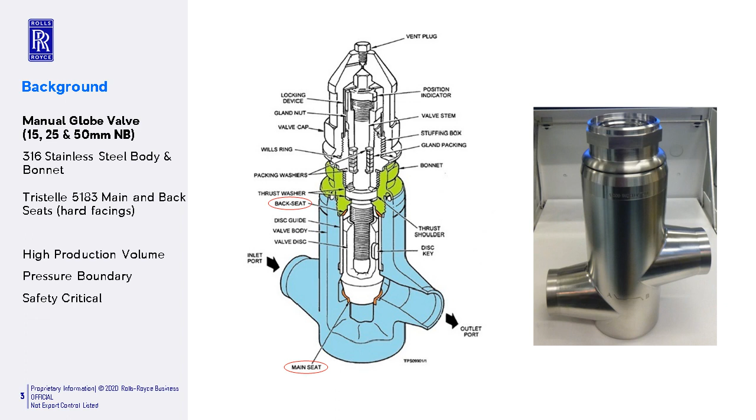So a little bit of background around the current method of manufacture. Step one, we take a large rough machined initial billet of 316L material. Step two is then to produce the Tristelle insert. This is made from metallic powder that is hot isostatically pressed, hipped into bar form and then machined into the insert.

Step 3 and 4 is around producing a stainless steel plug, which is then used in step 4 to encapsulate the Tristelle insert into the wrought body. This then goes through a second hip cycle, which actually bonds that Tristelle to the 316 material. Step 5 is around machining the internal profile of the component, including the main seat. Step 6 is around the final machine of the external form. This same process is used for the back seat when producing the bonnet component as well.

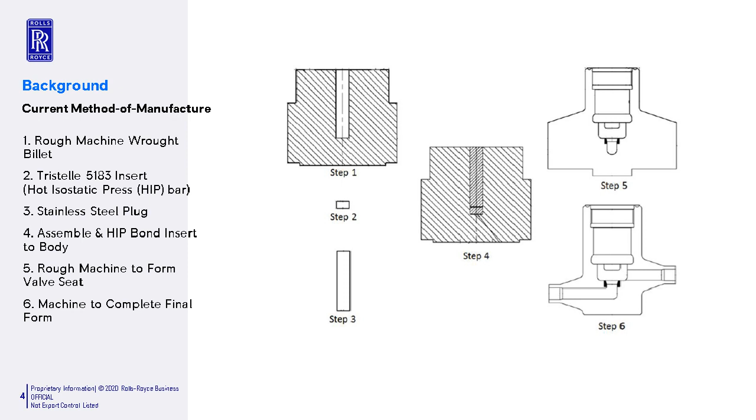So what are the issues with this method of manufacture? The mass of the initial forging is around 10 times that of the final part, so we have a significant amount of material waste. In step 2, there's a long lead time in terms of production of the hip insert. In step 3, the stainless steel plug is not actually part of the final component and therefore is 100% machined away. There's a cost in terms of cleaning and welding of the parts prior to the hipping process. And as mentioned, there's a significant time and cost for the actual machining stage in producing the final part from the billet.

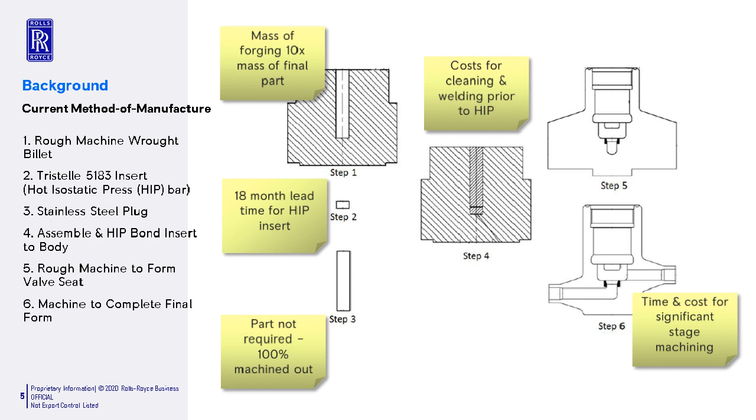So how does the AM method of manufacture differ? We again start off with stainless steel and Tristelle metallic powder produced within our supply chain via gas atomization. This is sieved to the specification powder size requirement. We then start the build with the Tristelle inserts, built on stainless steel discs using laser powder bed fusion additive manufacture technology.

These are then cleaned, packed, and stored for later use. We then build the stainless steel body or bonnet component using, again, laser powder bed fusion technology up to a midpoint just above the location of the actual insert. We pause the build and evacuate the powder from the insert location, leaving an inbuilt recess. We then take the previously produced Tristelle insert and position it in the build with the stainless steel disc uppermost, and continue the build process over the insert, encapsulating it in position until the final near-net shape valve body or bonnet component is formed.

Material control samples and hip bond specimens are also built on each build plate for later assessment. Once the entire build plate is complete, it is removed from the machine and put through a HIP cycle, which ensures a number of key issues.

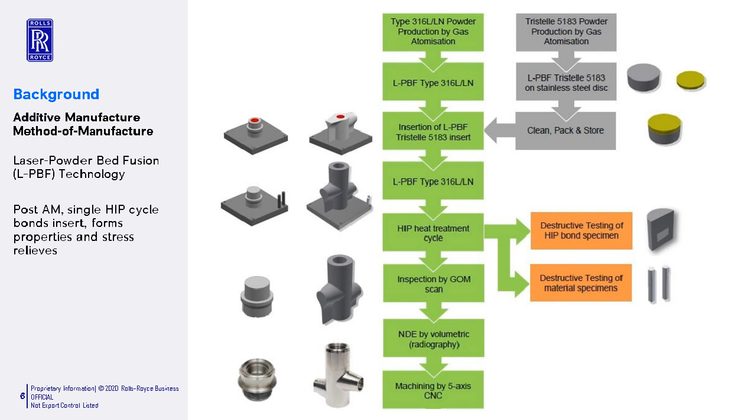This slide gives some illustration of the AM method of manufacture. So from left to right, we have the initial Tristelle 5183 insert built on the stainless steel disc. We then see the valve bodies built up to the midpoint where we pause the build and evacuate the powder to reveal the insert location.

You can then see the loaded Tristelle insert in the body. And then finally, once the build is complete, the valve bodies are removed from the machine along with the control specimens, and the complete build is then passed through the HIP cycle.

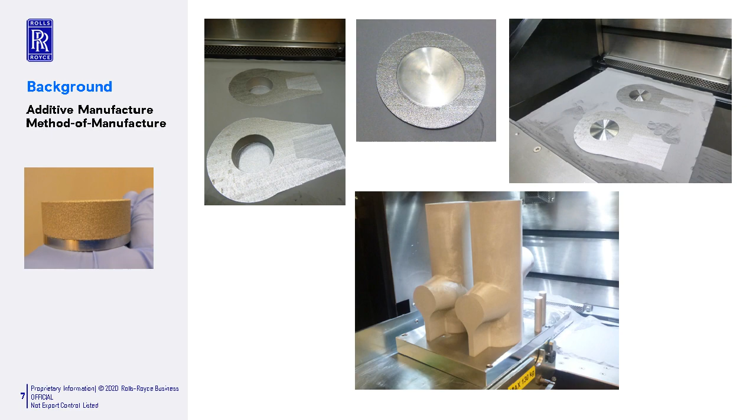So once the method of manufacture is established and the application is chosen, how do we get buy-in from the business and the customer to invest in the novel technology? Well, we developed a business case.

This is not solely based on cost reduction and lead time improvements. We also took into account a number of additional benefits. One of these being the additional quality assurance provided by the process. So we accept the metallic powder before it comes into the business, as well as accepting every build plate with examination of the material control samples and the hip bond specimens.

Also, the choice of materials allows us to exploit the technology further, as they cover a broad product range within the business. So once we establish an operational baseline, we can then look to exploit the technology further and expand on the number of applications.

Also, as Rolls-Royce are leading the implementation of the AM technology, it allows us to share our understanding with other parts of the Rolls-Royce business and our key partners across the enterprise. And then finally, using novel technology promotes innovation, so we've got a number of patents being filed just on the manual globe valve application itself.

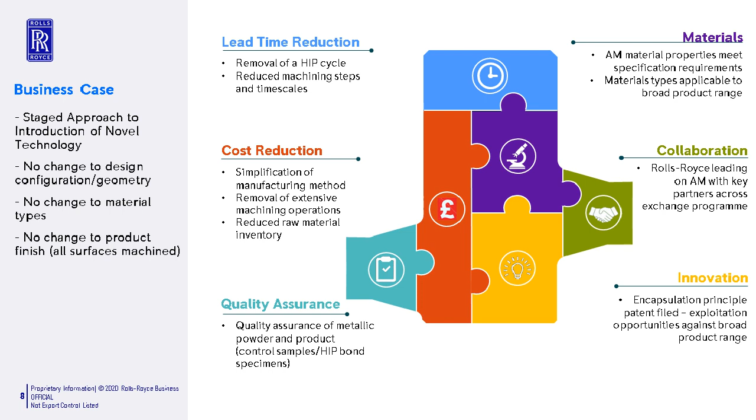And then, as we get operational experience and confidence, we can start to really use and exploit the technology more, push the design and actually design for additive manufacture.

So how do we go about providing a robust design justification for the introduction of the novel technology, noting that this is the first pressure boundary application on a safety critical component? We set out the justification around four independent legs, principally based on the TAGSI methodology.

That is the Technical Advisory Group for Structural Integrity, which the method was originally set out for achieving an incredibility of failure type argument, which isn't required for the manual globe valves. But we've used it as the basis for the methodology, to provide what could be termed a beyond code case for this safety critical application.

And the four legs are made up of design and manufacture, with the major input being from the technology itself and development of the method of manufacture. Leg 2 is around functional and performance testing.

So testing we've done on the material and the components during the development phase, and also once the parts are in production. Leg 3 is around failure analysis, stress, fatigue, and defect tolerance assessment. And finally, leg 4 is forewarning of failure, looking at the through-life aspects, failure mechanisms, and any in-service testing and inspection requirements.

So the presentation now goes on to expand on each of these four legs.

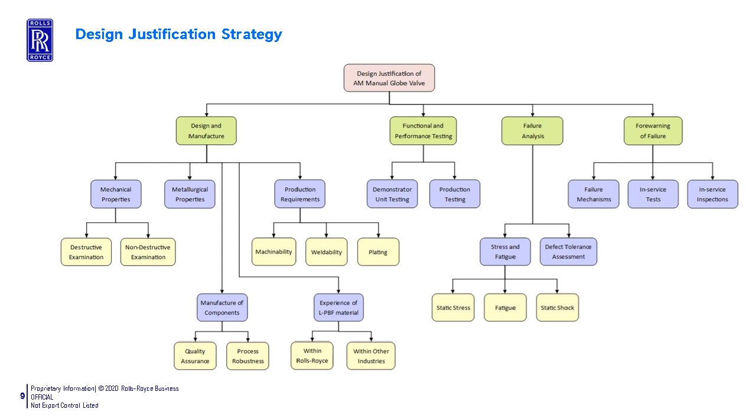So, as expected, with the introduction of a new and novel material production method, we've carried out a significant amount of materials assessment and testing on both the stainless steel and the Tristelle materials. We've not got time to go through this entire package of work in detail, but some of the key points are...

All the materials were tested in the final condition, post the HIP cycle. We tested a number of different material batches in a number of different test orientations, all with the intent to demonstrate that material properties were equal to or better than the current wrought material specification.

In terms of mechanical tests, we did tensile, Charpy, hardness, fatigue, fracture toughness. Metallurgical tests included chemical analysis, grain size, cleanliness, macro and microstructural analysis, also looking at the 316 to Tristelle bond line in detail, and also corrosion testing — stress corrosion cracking, pitting, crevice, and intergranular cracking.

All these assessments are really looking at the material behaviour and looking to understand if it has similar characteristics to its wrought equivalent.

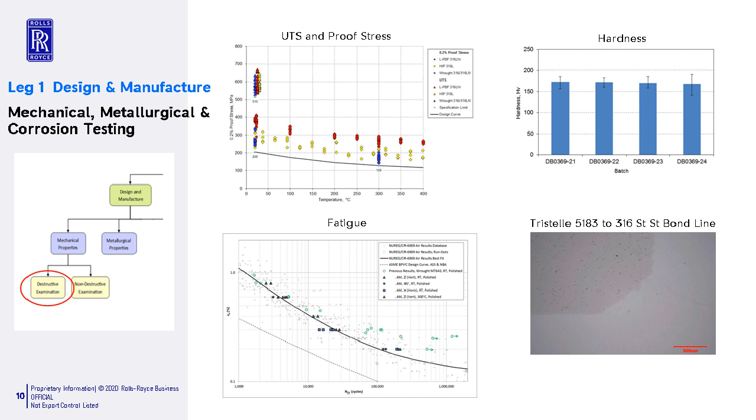One of the key concerns around the AM technology is the in-process residual stress and the effect this can potentially have on the start-of-life material properties.

So we performed contour residual stress measurements taken directly through the center of the valve body, including the valve seat, which was an area of concern. This confirmed that there were no significant residual stresses remaining in the final part after the HIP cycle.

We also, as you can see in the figure on the right, purposely introduced a defect in order to understand the residual stress effects from a lack of bond on the external surface of the component. We also saw a surface effect on the upper section, believed to be due to the sectioning and measurement method applied.

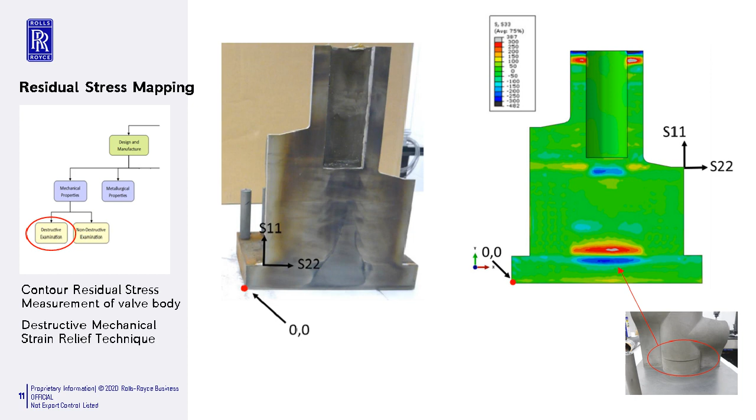So still on leg one, in terms of non-destructive examination, the current process — the 316 forge bar and the Tristelle 5183 hipped bar — are all examined using ultrasonic inspection techniques, using standard methods against code requirements.

However, with the additively manufactured valves, this introduced the requirement for a radiographic post-HIP cycle inspection, principally as a result of the near-net shape of the parts, and also from analysis of the potential start-of-life defect sizes and their forms.

So in order to understand a little bit more about the potential defects, we had an expert elicitation exercise, which included company experts local within Rolls-Royce, and then also the wider academia, in order to understand and agree the potential range of start-of-life defect sizes with this particular method of manufacture. These are then used to guide the inspection techniques to apply, and also the acceptance criteria for these inspections.

Something worth noting is that as confidence grows in the technology and its application, we are looking to exploit the AM further with the use of the through-process melt pool monitoring that the machines offer, and hopefully use this to eliminate the requirement for traditional volumetric examination methods, obviously with the cost and timescale benefits that brings.

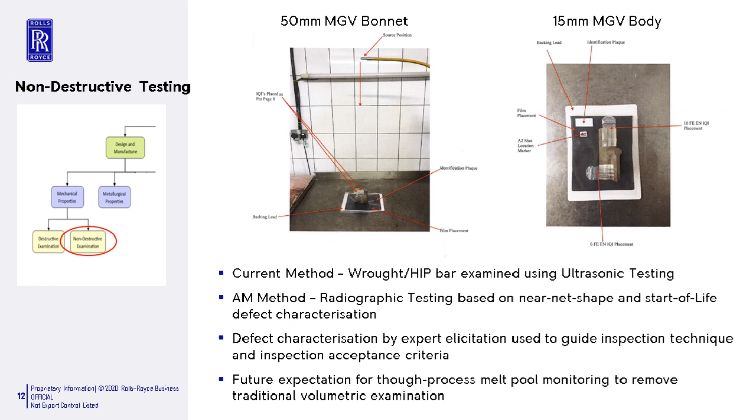Finally, in terms of leg one, we also carried out a number of trials reviewing standard production methods, including weldability, reviewing weld width to depth ratios, and also trials on both automated and manual welding of canopy and fillet welds.

All trial welds were assessed via mechanical properties, microstructure, and corrosion resistance, all with the expectation to confirm that the existing weld procedures remain suitable and can be applied without change.

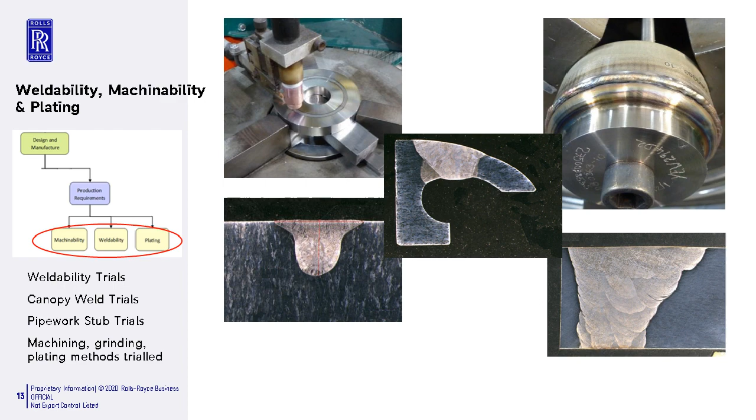Also, as part of this leg, we confirmed that the material performs as expected when applying traditional machining, grinding, and plating methods, and the results were equal to its wrought equivalent.

Just moving on to leg two. This is around the function and performance of the body and bonnet components, and when built into the valves, really to confirm that they're suitable for use and will operate successfully for the full lifetime of the plant.

So, as well as the extant testing methods that are applied to the current components as part of production, such as component hydro tests, valve seat checks, hot and cold valve testing, we also specified tests that go beyond the code requirements. We undertook an ultimate hydrostatic pressure test, an endurance seat performance test looking at wear of the seat, a shock test, and also a thermal fatigue test.

So the next few slides just expand on these tests.

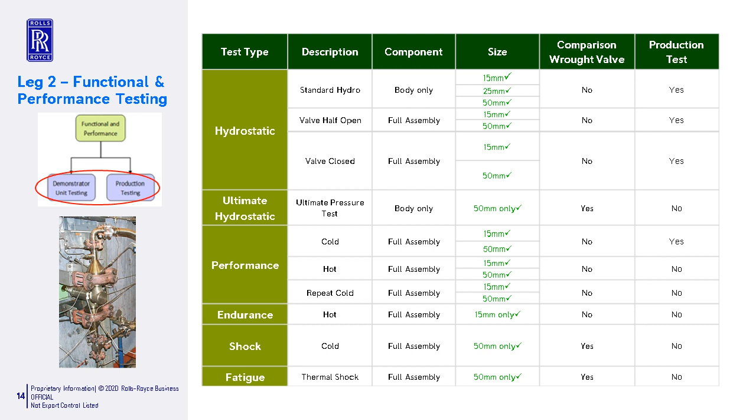So in order to explore the full pressure capability of the AM components, we carried out what we expected to be an ultimate pressure test, really in order to initiate failure. This was on both an AM valve body and a wrought valve body, to enable a level of comparison between the two manufacturing methods. We designed a pressure test rig to go well beyond the design pressure of the components and apply an increasing internal pressure at stages to the blank top bodies. This rig was able to go up to around 2,000 bar, so we're really trying to blow up the valves.

What we found was that both valve bodies retained the full pressure without failure, just experiencing a level of permanent deformation, which you can see from the image on the right. You'll notice the AM valve had slightly less deformation, which we believe was a result of the slightly enhanced proof stress properties we previously discussed. During each test, we also took strain gauge measurements at two locations that proved both materials and material manufacturing methods had representative strain rates against the increase in pressure range.

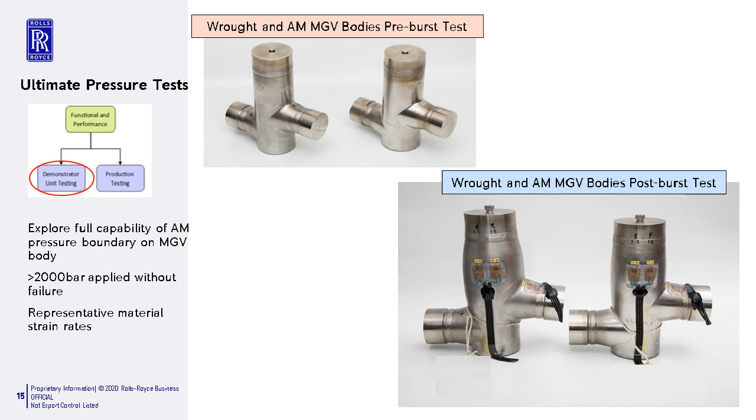So in order to test the integrity of the valve stubs and the valve seats against dynamic type loading, we also carried out a series of shock tests on full valve assemblies welded to pipework and mounted on a 2-ton test platform. Three different test orientations, again both with an AM and a wrought valve in order to provide direct comparison. We applied approximately over 150 G to the arrangement during each test, with the valves water loaded and set in the closed position, as with the majority of the valves in service.

What we found was that all valves successfully passed the pre and post functional checks, with no deterioration of valve function in terms of seat leakage. We also closely examined the valve stubs, looking for any signs of distortion or cracking, and none were apparent.

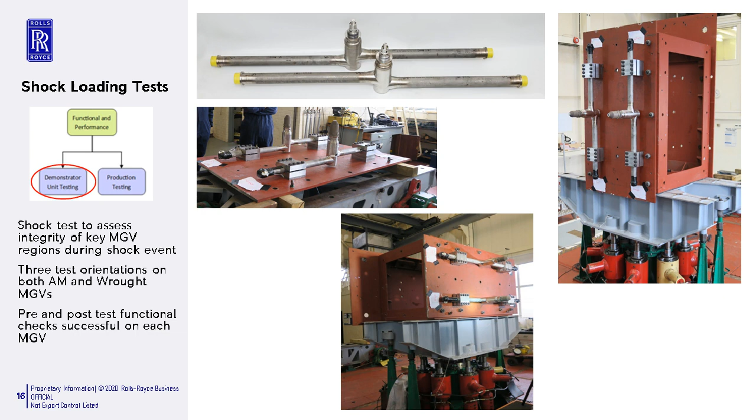Finally, in terms of testing, as a further test of the AM valve's integrity, we specifically looked at defect initiation and crack growth, and we carried out a thermal fatigue test on three of the manual globe valves. Again, two produced from Additive Manufacture and one from wrought, which were welded into a U-shaped test train, also along with two AM pipework tees that we're looking at for a future application.

So in support of this test, we carried out an ASME 3 Appendix 2 assessment, specifically to work out the loadings for each of the thermal cycles and also the number of cycles to apply, to ensure that we significantly exceeded those experienced during plant operation. This was really up to a factor of around 10.

The test train was then fitted to a rig, which had a hot loop and a cold loop, which could be valved in and out of the test train almost instantaneously in order to introduce the thermal cycles a number of times. The ASME acceptance for this test is that no through-wall defect is generated throughout the test. However, we also paused the test a number of times just to check the valve's functionality in terms of seat performance. Again, all valves successfully passed this test.

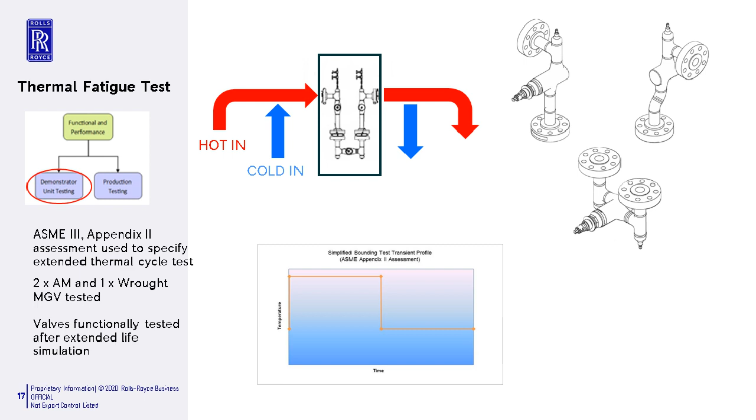Just moving back onto the justification legs. Leg 3 is all around structural integrity analysis that's been carried out on the valve design. So the current manual globe valve has a significant amount of analysis from static stress, fatigue, dynamic shock, etc. We don't have time to go through this analysis in detail as part of this presentation. However, we do point out the approach for this leg is that we don't repeat all this analysis due to the introduction of the AM technology.

So we use the material test data generated in leg 1 to confirm that all the materials inputs are still relevant and not undermined. And then we also use the results from the functional and performance tests undertaken in leg 2, just to provide further assurance that the design is sound - and we actually saw this from the tests we carried out in terms of the ultimate pressure test, the shock test and the thermal fatigue test.

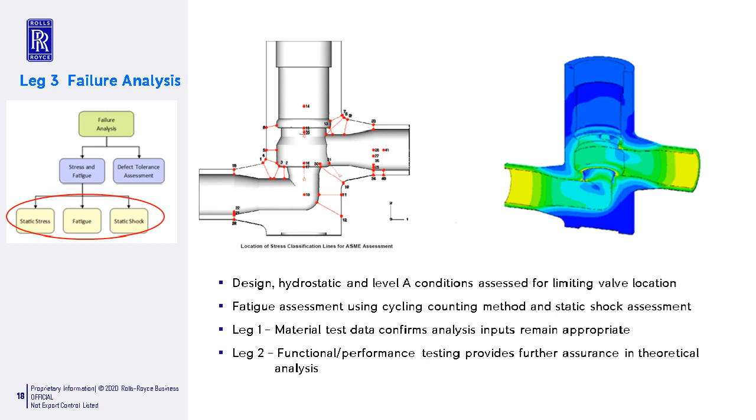Finally, leg 4 is all around forewarning of failure, and this is centered around the in-service operation of the valves and the through-life support required. So we currently have a failure modes and effects analysis for the valve design, which reviews all the potential failure modes through life. Again, the intent really is to use the work carried out in the other supporting three legs to prove that there's no additional failure modes from introduction of the AM technology.

As with the current manual globe valves in service, we carry out inspections looking for evidence of corrosion or EAC, and a number of the valves are removed and sectioned in order to assess the valve seats for evidence of bond line corrosion, and check the condition of the seats through life. This approach isn't going to change for the AM valves - those in-service inspections will remain.

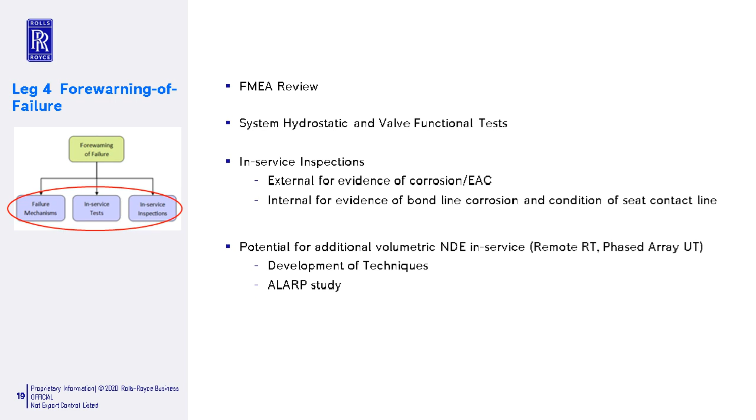So this is the final slide of my presentation. It's really summarising some of the key points that we've learned from introduction of the AM technology, really centred around how this can support the structural integrity of a design.

In terms of material defects, the sizes are limited principally by the powder particle size, but also the HIP cycle we introduce helps to limit and reduce porosity and lack of fusion type defects. In terms of residual stress, the HIP cycle reduces any in-process stresses produced, and use of the AM technology can allow us to remove traditional welding or joining methods that could introduce residual stresses into the design.

In terms of material microstructure, the grain size is reduced, going from ASTM3 to around ASTM5. The microstructure is consistent in complex forms, and the materials seem to have good cleanliness from the controls we apply to the initial powder production.

In terms of material properties, we've seen the properties from the stainless and Tristelle are generally consistent with those from their wrought equivalent, and also consistent even in complex forms.

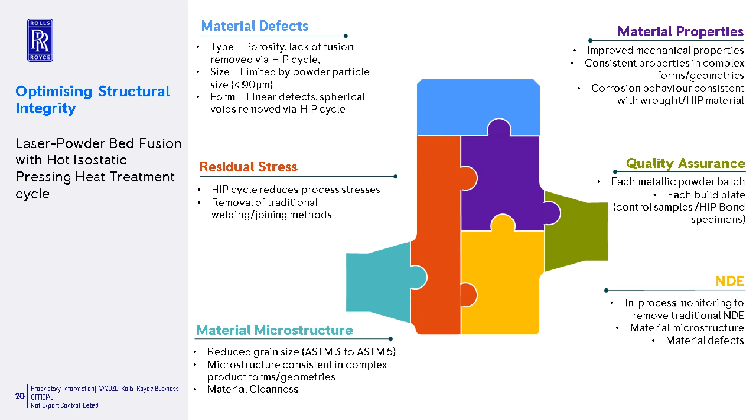Thanks, Bill. Just a reminder, as it says on the slide, my name is Gary Jones, and I'll be talking about HIP replacement, use of low alloy steel powder in high integrity pressure vessel manufacture. There's a tongue twister for you.

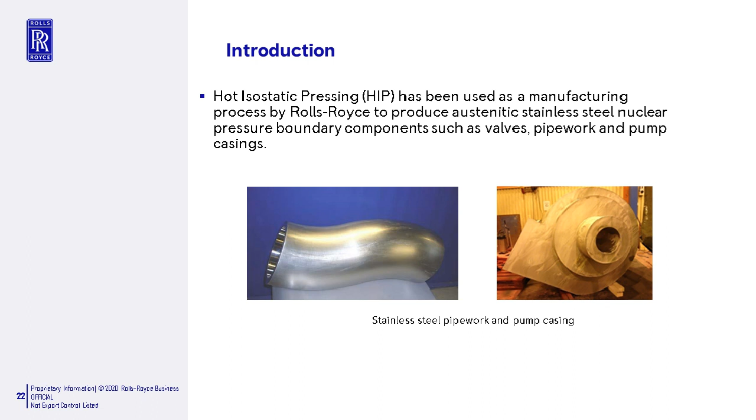Okay, first slide. So HIP, or hot isostatic pressing, has been used as a manufacturing process by Rolls-Royce to produce a number of components to date, such as valves, pipework, and pump casings, and there are a couple of examples on that slide, both being stainless steel, one a piece of pipework and a pump casing. Fairly large components, but well established and used in production.

Things to consider regarding hot isostatic pressing: the austenitic stainless steel components we've produced to date have a fine homogeneous grain structure and also isotropic properties. That's quite a contrast to the different structures you can find via more traditional methods such as forging and casting, which arise from the method of working or how the grains have grown during solidification via those processes.

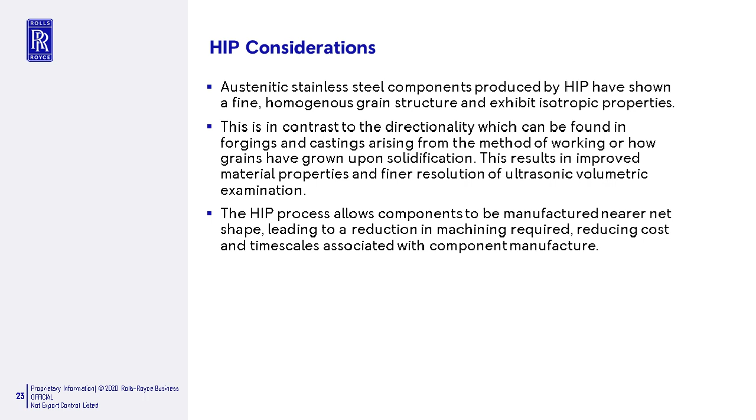The results obtained via the HIP give improved material properties in terms of finer resolution of the microstructure, and that's been proven out via ultrasonic measurements. The HIP process also allows components to be manufactured much nearer net shape, which is a great move for manufacturing—it reduces the amount of waste and processing time when you can get much closer to the end form.

A little slide there which shows a few pictures, and this is all about Project FAST, which I explained earlier, Future Advanced Structural Technology. This is a project we've launched with support from BEIS, Business Energy Industrial Strategy, UK government, and we're performing the work in collaboration with the Welding Institute in terms of electron beam welding, and the MTC for near net shape manufacturing.

They're kind of the HIP experts on the HIP process. And what we're looking to do is look at new alternative methods to forging, casting, and arc welding processes, and move into additive processes using hot isostatic pressing combined with thick section electron beam welding.

So at the bottom of the slide there's a little timeline. To the left-hand side is some small-scale previous work we did at Rolls-Royce to prove out the process on a billet or small component level, hipping the material we're interested in, which is 508 forging material or 508 powder. In the middle, between the hashed lines, is the work content that will be delivered via Project FAST.

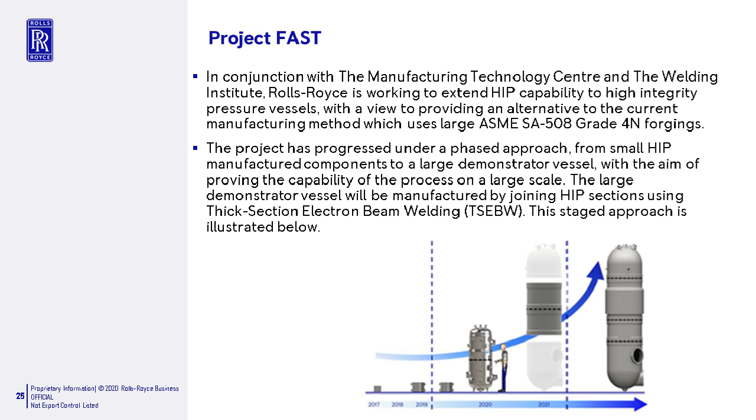A small vessel next to the mannequin in the middle shall be the world's first hipped and EB welded pressure vessel. During the latter stages of the project next year in 2021, we'll start to produce vessel straights, or sections of a larger pressurizer type vessel, that we'd look to produce in FAST Phase 2, which we hope to bid for very soon.

That vessel will be subjected to a suite of pressure and thermal cyclic tests aligned with ASME requirements, helping us demonstrate and validate the use of HIP and EB welding to produce vessels. We put lots of features on there to really test the process and explore the boundaries, making sure it's capable of producing the extremes of geometry we could possibly need. Each stage of the project will also have material samples and prolongations, continually generating material property data to substantiate this new process for pressure vessels.

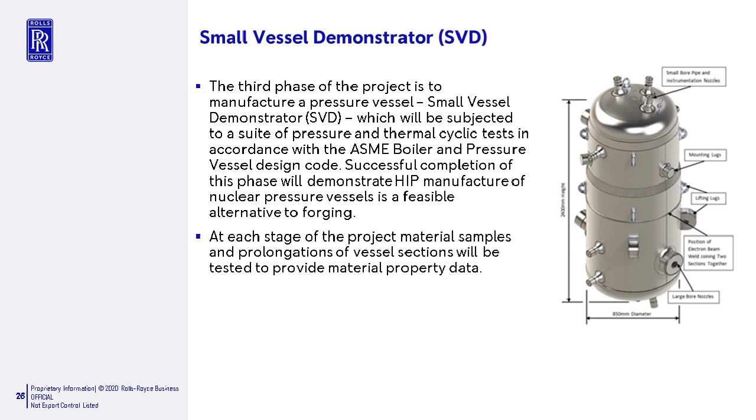The morphology needs to be right, because the critical point here is how you fill your canister. You need uniform powder flow, and you need really good packing within that canister so that your HIP process gives you a high quality part at the end.

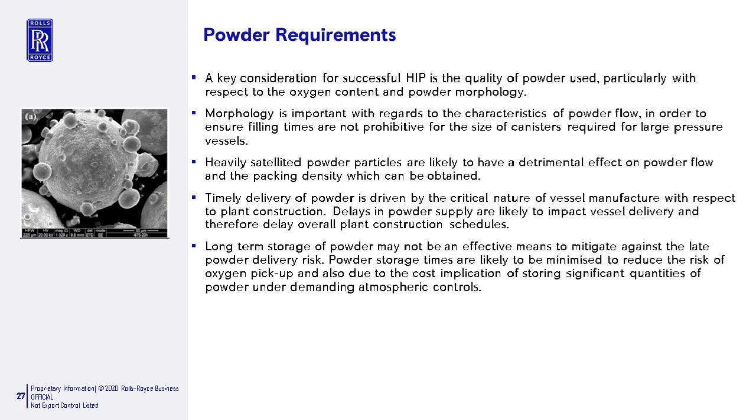Delivery of powder is also very important, because delays in delivery or supply would impact your vessel delivery times. You can either produce a lot of it ahead of time, but then you've got to store it in a very controlled atmosphere, or you can bring on the supply chain, as we've been doing, working with strategic partners, so we can pull the powder as we need it in more of a just-in-time setup. So powder is key.

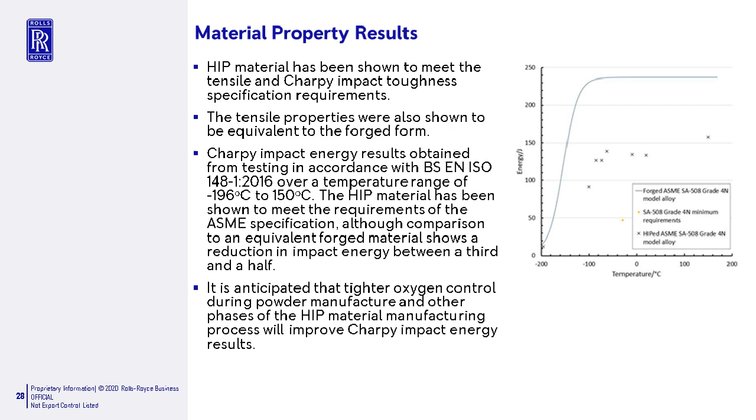We can meet tensile and Charpy impact values. They're also equivalent to forged form for tensile properties, and the HIP material has been shown to meet ASME, although comparison to equivalent forge shows a reduction in impact energy. We believe we can improve those characteristics through further oxygen control during powder manufacture, further controls and tweaks on the manufacturing process from filling through to packing through to the HIP cycle itself, improving Charpy impact energy results up to equivalent to forging.

Conclusions then of my brief summary of Project FAST. We've been manufacturing pressure boundary components using HIP very successfully to date, and now we're looking to move to more large-scale components. Using HIP as an alternative to forging has many advantages in terms of cost reduction, rate reduction, and much reduced waste because we can achieve much nearer net shape.

Powder manufacturers are key, and powder control is key to achieving quality product at the end - a good in, good out philosophy to be followed. To date we've shown that the HIP material can meet requirements, but via further refinement we think we can improve Charpy impact toughness to the forge level.

To make it abundantly clear, oxidation of powder needs to be fully understood and controlled if you're going to achieve toughness and the required material properties needed for nuclear components. It's a very exciting project, quite a move away from traditional processes, giving us real advantages for nuclear pressure vessel manufacturing and the wider nuclear component manufacturing by moving to the additive HIP process and EB autogenous non-filler welding processes.